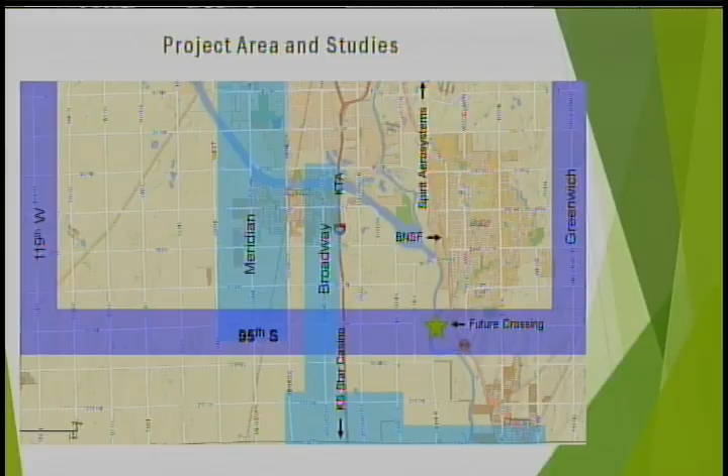There have been a lot of traffic studies done in this area. It started with the South Area Transportation Study done by WAMPO in 2008. There was a 2011 South Meridian Corridor Plan, a 2012 South Broadway Corridor Plan, and the 2013 Casino Area Transportation Plan, all of which made reference back to the South Area Transportation Study, and then ultimately the ARC 95 study completed by Sedgwick County in 2017. So a lot of research has been done on the transportation needs in this area and identifying the need for improvements.

The South Area Transportation Study was done by WAMPO in 2008, and it indicated the need to make improvements to the corridor. Specifically, it emphasized a lack of a good east-west corridor in the south area and the need for an additional river crossing. It specifically indicated that the existing river crossings at 47th Street, 63rd Street, and 83rd Street would exceed their capacity within about 20 years, or by 2030. Well, that was in 2008. We're halfway there, so now we're looking 10 years out and running into capacity issues on the existing river crossings.

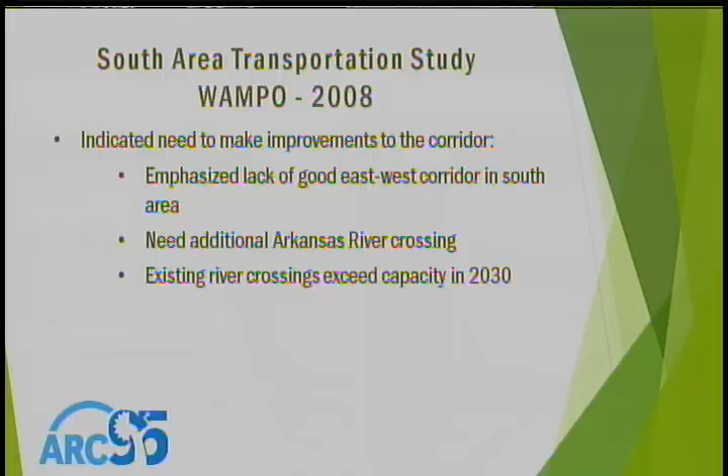The ARC 95 study was completed by Sedgwick County in 2017, and it took the South Area Transportation Study and refined it, making specific recommendations. The South Area Transportation Study was a very good high-level view of the needs of the area. It evaluated different options, specifically looking at grade separation, a new grade-separated corridor all the way through the southern region. That was determined not to be very cost-effective.

The numbers were kind of astronomical on that, and then it landed back on maybe looking at a parkway system that could connect the south portion of the WAMPO region to northeast and northwest Wichita by connecting to Kellogg at 119th Street and Greenwich. So it developed cost estimates, evaluated options, and also set up a phasing for implementation of the improvement. This was a much more refined look at what needed to be done, what barriers were in the way, how those barriers could be addressed, and then how you would implement those improvements.

The focus was on 95th Street between Broadway, US 81, and Woodlawn, just east of K-15, and included the potential for a new KTA interchange. When the South Area Transportation Study was done, KTA was involved in that process, but were not, I would call them, too cold on the whole idea of another interchange to the turnpike.

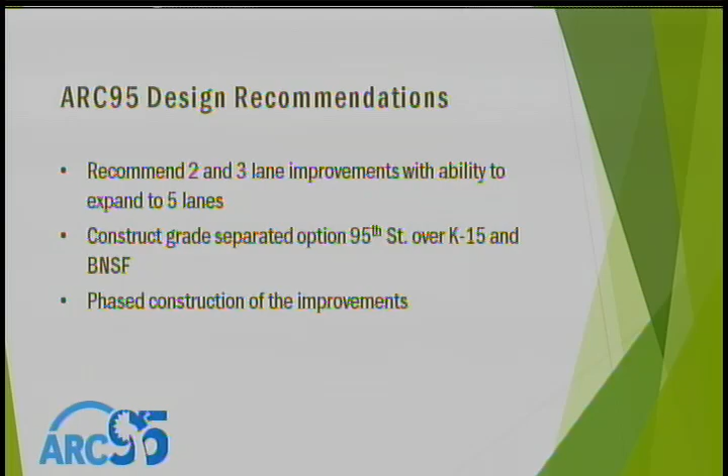The final recommendations of ARC 95 included 2 and 3 lane improvements with the ability to expand to 5 lanes, construction of a grade separated option at 95th Street over K15 and BNSF Railroad, and then phased construction of those improvements.

So again, if you see the magenta or the purple, it's okay. The magenta is phase 1, and that's really the lion's share of ARC 95. It's the crossing, and it's the big money piece of ARC 95. The rest of the phases of ARC 95 can fairly easily be implemented with local funding in fairly small chunks.

But the magenta includes a little bit of improvement at US 81, and that's because as soon as you build the river crossing, the traffic increases and you're going to need additional lanes at that location.

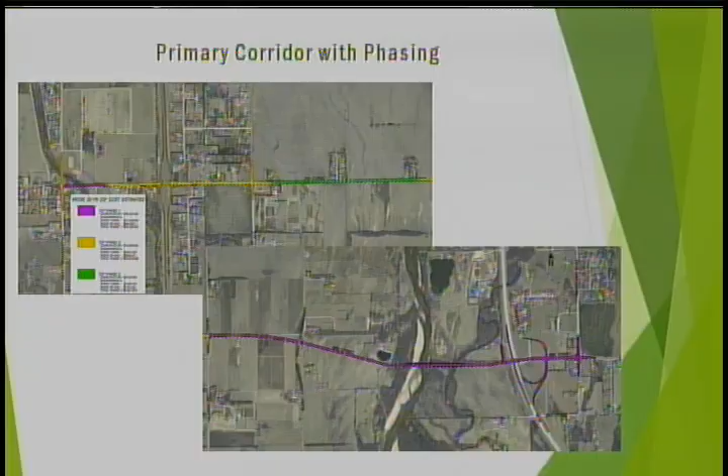The big piece is the crossing of the Arkansas River and the new interchange at K15. That's phase 1 of the improvements. It's fully directional at K15 and grade separated. It's the only river crossing south of 83rd Street, which is 7 miles before you get down to K53. It's also the only grade separated crossing of BNSF Railroad south of Kellogg, so it provides a significant improvement in that regard.

This is, again, the crossing. As I said, it's fully directional and grade separated, so you can get it over the railroad tracks.

I mentioned the turnpike being supportive, and I mentioned the public being supportive of these improvements. The railroad is supportive of these improvements too, and if any of you have worked with the railroad, that is not always easy to say. The railroad, as part of this process in dealing with the county, actually agreed to allow a portion of the bridge abutments in railroad right-of-way. That's how they felt about these improvements, and it's almost unheard of for the railroad to allow anything to encroach into their right-of-way.

So a lot of support because of the grade separation. This is a mechanism to get freight across the railroad without doing it at a grade crossing, and it provides access to K15 in that process.

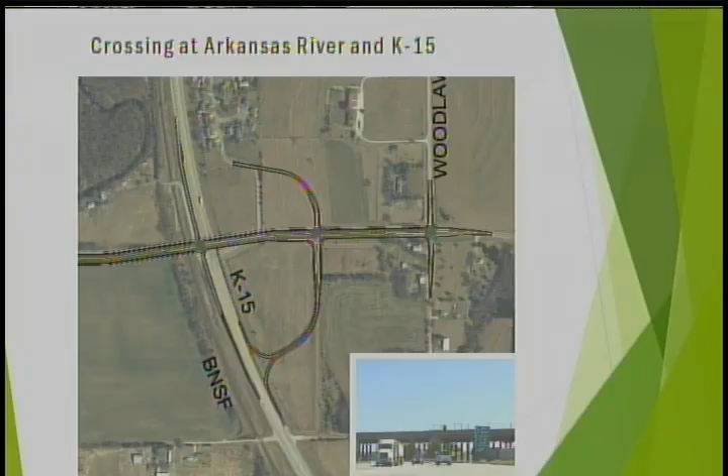Benefits of the project are enhanced safety and emergency response, and improved traffic flow. This provides an alternate to a lot of traffic from K15. Specifically now, traffic that comes up K15, including trucks, a lot of it goes all the way up to 47th Street, where it queues up. The turn lanes at 47th Street cannot support the traffic demand for that left turn for northbound traffic. So this provides turnpike access before you have to travel all the way through the K15 corridor to 47th Street—you can get on the turnpike and head north. A lot of that traffic that comes up now and has to turn left and drive through Oaklawn to get to interstates could use this corridor instead.

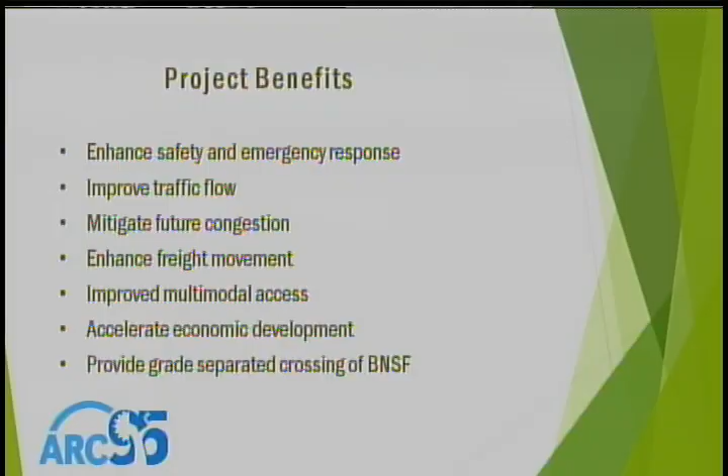It mitigates future congestion, enhances freight movement, improves multimodal access, and accelerates economic development. That entire 95th Street corridor becomes very advantageous to manufacturing development when you have direct access, grade separated, to K15, and direct turnpike access from 95th Street. So there's a lot of vacant land out there that's available now that could be utilized in the future. And as I said before, it provides a grade separated crossing of BNSF.

The project supports 4 of the 5 stated outcomes of the MTP: safety and health, integrated multimodal transportation network, economy and mobility, and quality of place and talent. The study did also recommend pedestrian improvements and shoulders, so there's a pretty good safety enhancement there. And also an opportunity—we hear there are a lot of bikers in Derby, and probably all of you do too—there are not, in the rural areas, shoulders and things that facilitate bicycling out in the county. So this does provide a mechanism for bicyclists also, for an east-west corridor with grade separation.

Project cost for phase 1 is $62 million, for right-of-way, design and construction. I know that sounds like a lot of money, but when you look at regional priorities and regional goals, because we're out ahead of this and planning ahead for it, it's pretty cost effective. That's a year's worth of right-of-way on some projects to purchase, and one phase of a larger project for construction. So the numbers are big, but when you compare it to other projects for the benefit you're getting, this is a very cost-effective and manageable project.

So why? Enhanced safety, economic development. It alleviates congestion and addresses future capacity issues. The next steps: it needs to be included in Move 2040 as a regional priority. Possibly a protective overlay - I know the county and city of Wichita have used that mechanism with the Northwest bypass. And then funding right-of-way and design so that we can continue to move forward and be prepared to access funds for construction and the improvements.

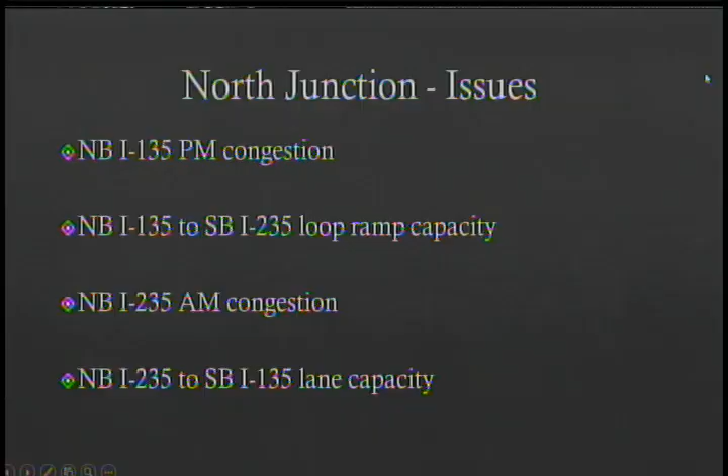A little bit about the North Junction — the issues there everybody's familiar with. In the morning, you have an issue coming into town, particularly northbound 235 into the area. Then in the evening, you have an issue going northbound on 135 to go southbound on I-235. Everybody's familiar with the loop ramp up there.

A little bit about the interchange — I have some notes I'll flip through as we go. This interchange was designed and opened to traffic in 1964. The 1957 plan showed traffic at 9,330 vehicles per day. Anticipated ADT in 1975 was 23,500 vehicles per day, 2.5% trucks. Coming in from the interchange from the east, we've got about 19,000 vehicles. From the west, 52,000 vehicles. From the north, 47,000, and from the south, 78,000. It's about 10% trucks on 135.

The study area for this project extends all the way from West Street to Hillside and from 21st Street to 53rd Street North.

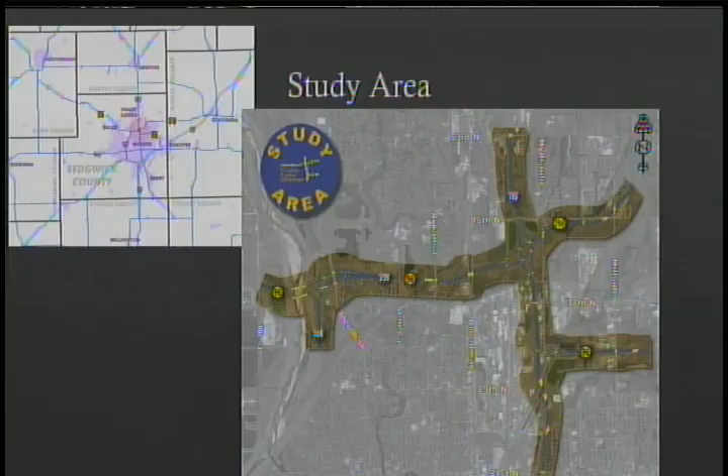We like to look at needs for highway systems in terms of congestion, using level of service A through F. This is in your handout somewhere in one of these — I don't think I made it into both presentations — but generally, like a report card, A is good, F is bad, and in our system we add an E in between D and F. E and F are unacceptable.

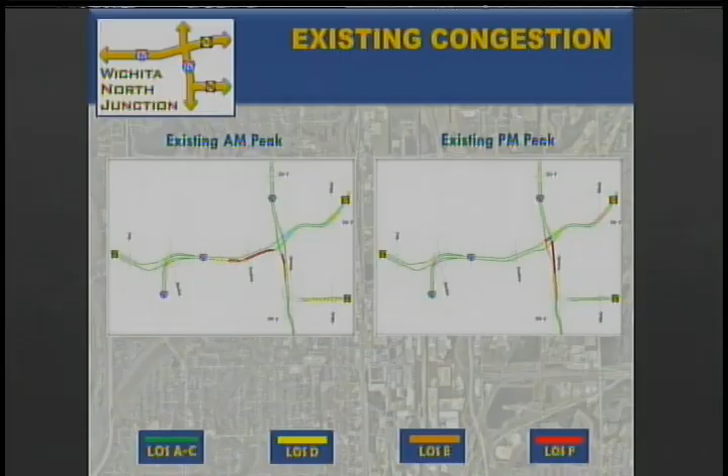At the beginning of the show, in the morning this shows level of service F coming into town, right over here, and then going north in the evening, another level of service F. This is the future no-build 2050 anticipated traffic, showing a complete breakdown at the North Junction — so bad it affects traffic all the way back to 96 coming in. In the PM, it affects traffic, obviously still northbound, but now 254, 235, and 96 are thrown in there even worse.

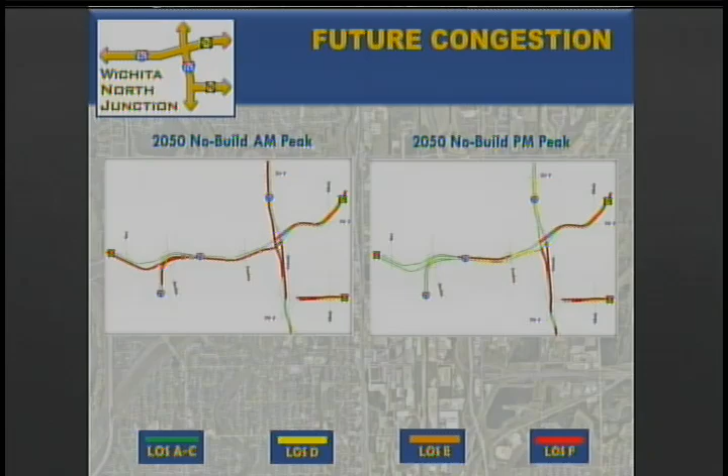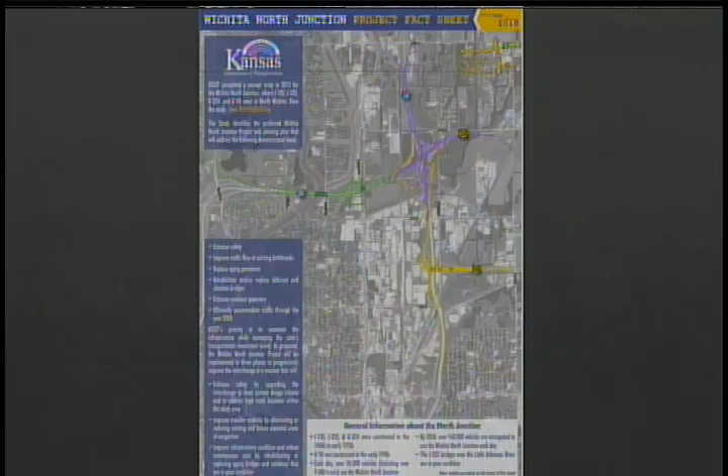This is just a fact sheet showing what we looked at for the North Junction improvements. This shows the 3 phases of the project that I'll talk about.

First, we identified some high priorities. There are quite a few on this interchange, but number one is the loop ramp up north here. This flyover ramp takes care of that issue. The northbound, or morning congestion for traffic on 235 wishing to enter the interchange, is taken care of by separating them, not grade separating, but separating them so they don't have to merge with 135 traffic. There's another improvement down here we'll talk about in a bit.

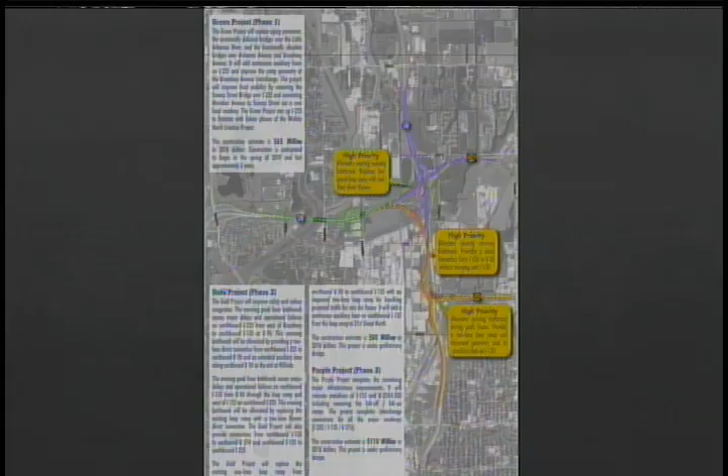The first phase of this interchange project is actually under construction already. We're doing the green project right now. Right now you have 2 lanes over the river. In the future, there will be 3 continuous lanes over the river with a 4th auxiliary lane for an off-ramp and on-ramp for Broadway. So pretty major improvements underway up there.

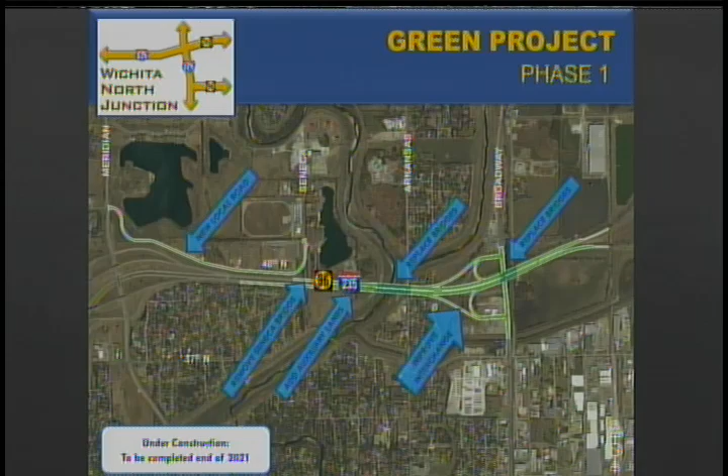You can also see how much of a change there is in the connection of Broadway from this area here, which is where the old ramp was. It widens out a lot, and you can see that when you drive through.

This touches on a little bit what I mentioned earlier. High priorities for this area: the flyover, the direct connection, and also the auxiliary lanes on K96.

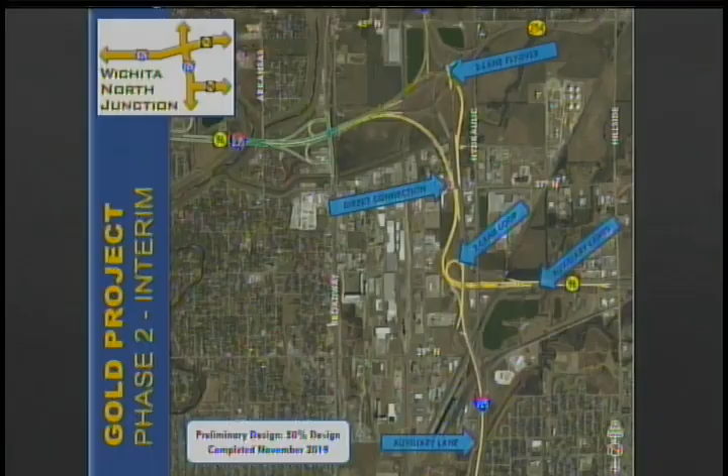This is a concept of just the Gold project as it stands currently. It shows the flyover, just a picture.

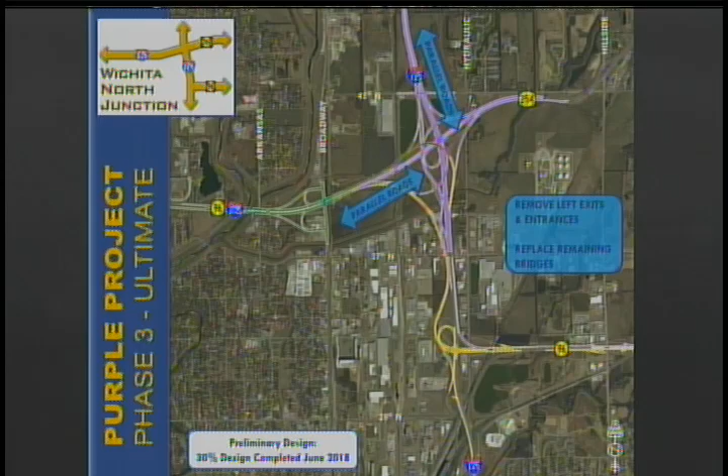This is phase 3, the final phase of the project. After Gold is constructed, we construct what we call the purple phase. In that phase, 135 northbound and southbound are put back right next to each other, and also the east-west portions of 235 and 254 are put back together. That allows for quite a few things to occur during the purple phase. It removes the left exits and replaces the remaining bridges up there.

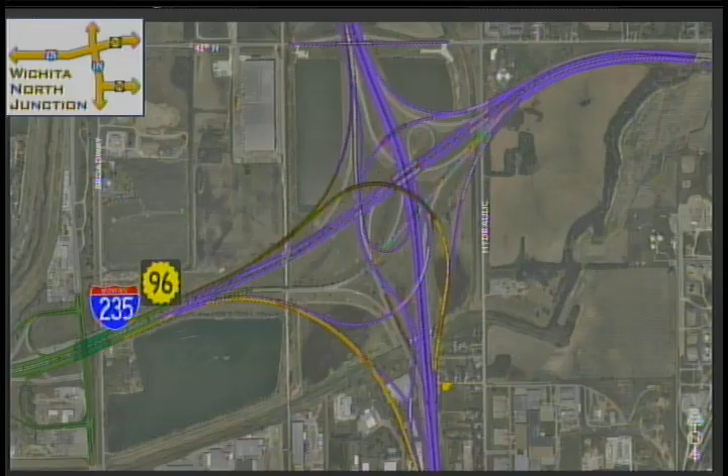This is a close-up, a better view of that area with the purple, the gold, and the green all shown together. There are some interesting movements here. When you look at southbound 135, your decision to move and come down this direction gets separated way back up north of 45th Street.

As part of that, any project KDOT has that goes over—used to be $25 million, I think it's $50 million now—has to go through a value engineering study to make sure we're spending our money wisely and doing the right things. That study was conducted.

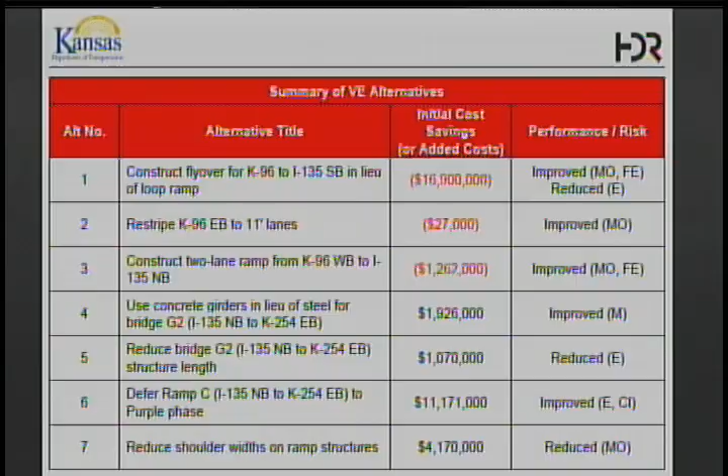In your packet, all this is in there, but it shows 7 alternates that were considered. The first one is to construct a flyover instead of a dual lane loop ramp, restripe K96 to 11-foot lanes, and construct a 2-lane ramp for westbound 96 to 135 northbound. Number 6 also talks about deferring one of the movements till later.

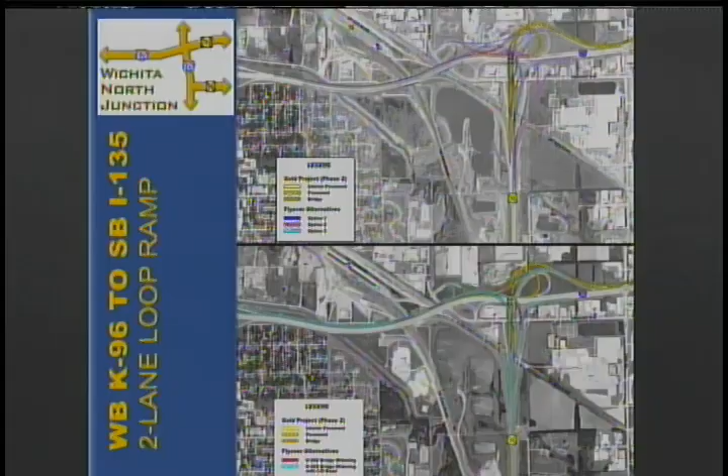Part of this, when we look at that number 1 priority of the loop ramp—we're taking the loop ramp. The north loop has 14,305 vehicles a day on it. The south loop, or the proposed dual lane loop ramp for westbound K96 to southbound 135, actually has 16,220, so it has more vehicles on it than the northbound loop.

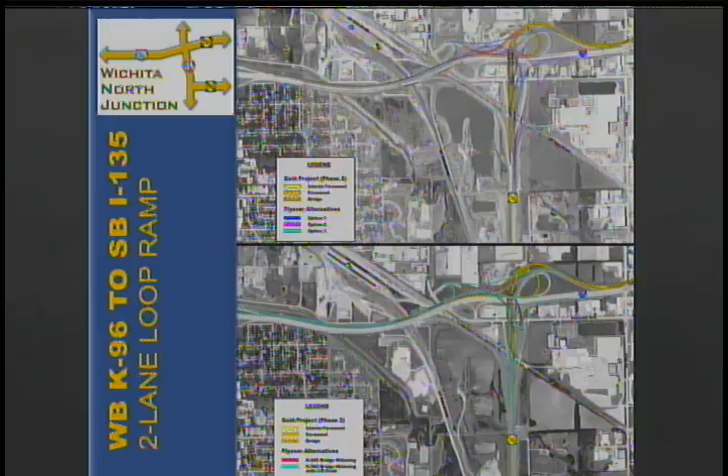If you like going 30 miles an hour on system-to-system interchange loops, raise your hand. Nobody appears to. So we thought it'd be better to look at a better option. With that, we decided on kind of a shotgun approach to what we looked at. You can see quite a few different options here. The gold is still shown, and the 2-lane loop is still shown in each of these with other options.

So the North Junction Gold project reduces the congestion—we've talked about all these items. It ties into the green project really well; that's what it was designed to do. It provides that direct connection. And these value engineering proposals, I'll talk about a little more.

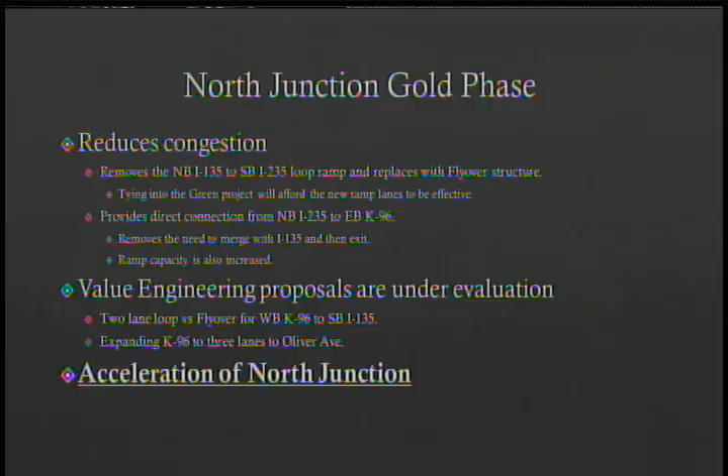The 2-lane loop and the K96 expansion. I also want to talk about the acceleration of the North Junction.

So we went to a meeting 3 Mondays ago during that snowstorm up in Topeka, and we visited internally about what's the best thing to do here. We agreed to move forward with—I'm going to call it the Not Gold project, I don't know what color that is, magenta or something—but that's the one we're proceeding forward with.

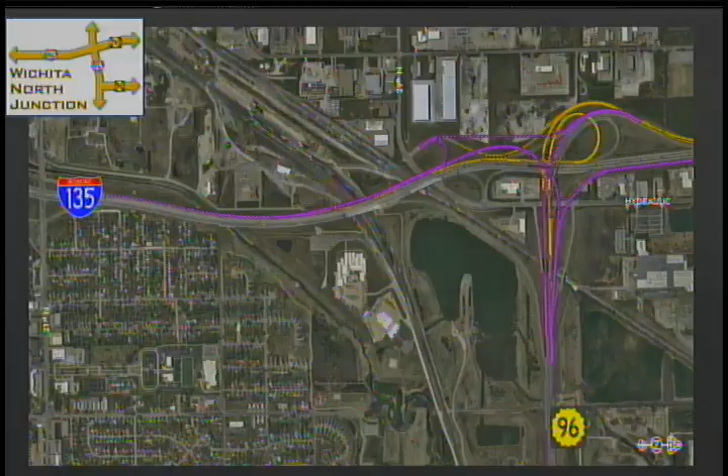It is, instead of the Gold Project widening these existing bridges over the railroad, making new structures over the railroad. The existing structures are already challenged by vertical clearance for the railroad. Encroaching on that anymore is not a good option, so this sets it up for the future.

As part of a program we call a cost share program, we started off looking at what we could do to make a better improvement to this interchange, because this is the highest priority in the region. We heard that loud and clear - getting rid of that northbound movement and the loop ramp is a really high priority for everybody in this room and KDOT.

So we looked at what we could do and came up with an option. This was an option we proposed, talked about between KDOT, the city, and the county, and this option started moving forward. The issue with this option is it doesn't create a full connection.

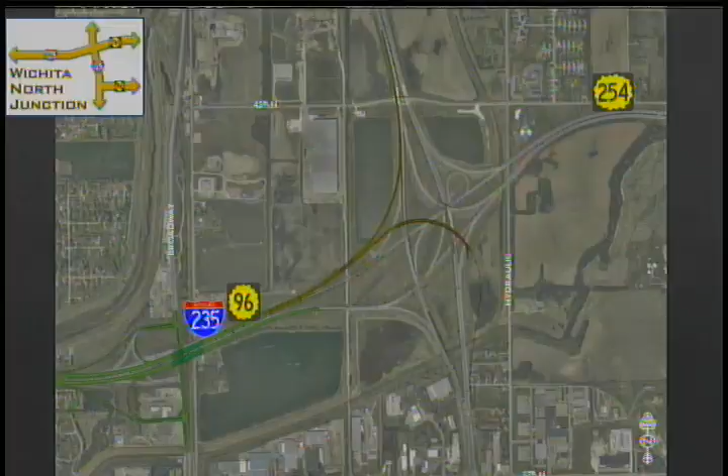So we decided, if we can - and there's some issues with crossing the channel here until all the permitting is in place, but we think we can work through those - ultimately the cost share program is a full-blown build of the entire flyover ramp for northbound I-135 to southbound 235, doing away with that loop ramp. As part of that, the southbound I-135 movement to southbound I-235 ramp is also reconstructed, with new bridges over the railroad. This is a cost share program with a 25% match, by the city, county, and KDOT all together.

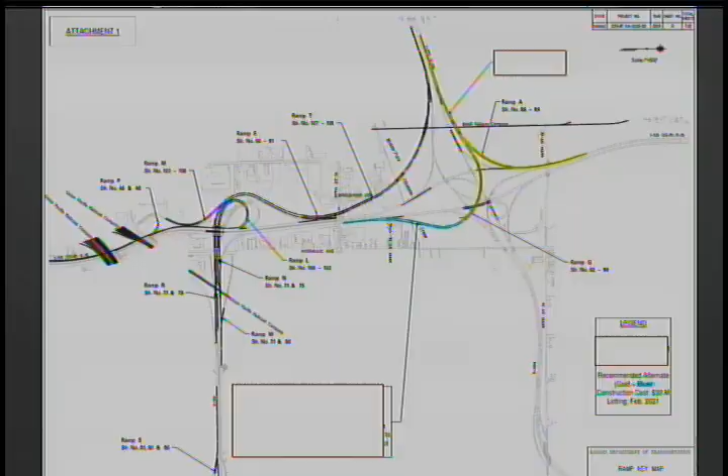So that's the North Junction. Does anybody have any questions?

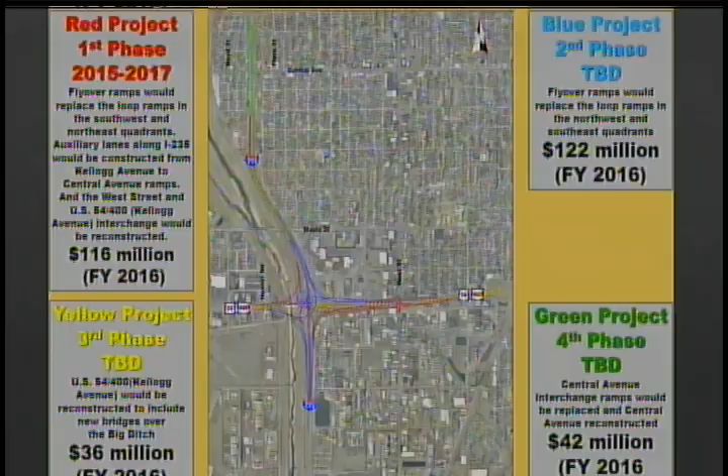Study area for these improvements really went from Ridge Road to West Street and from K42 to Zoo Boulevard.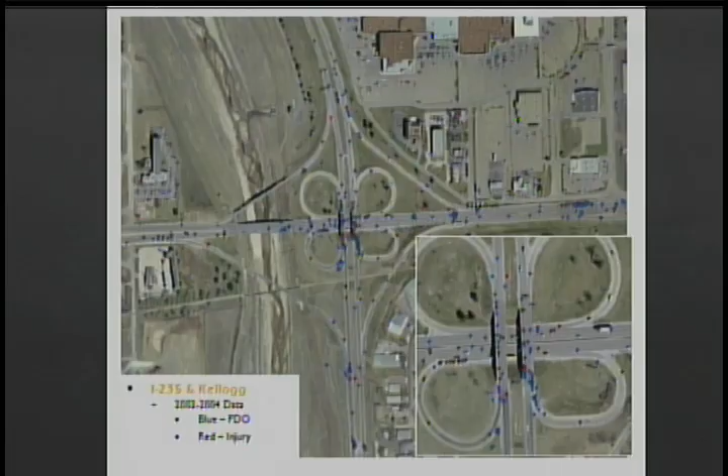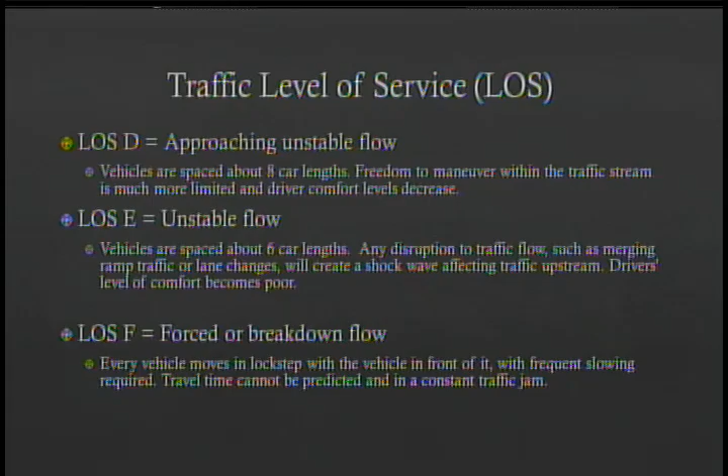So these are definitions for level of service that you could use. Again, E and F are unacceptable.

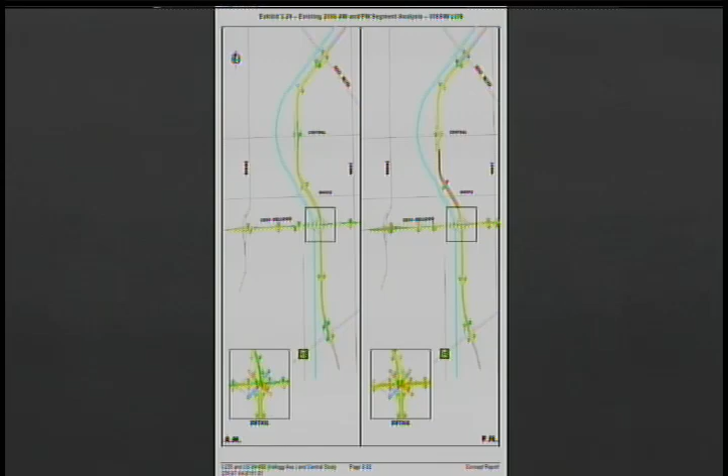So anytime we do a project, we do modeling of traffic - what's out there now, and what's it going to be like 20 years down the road. This 2006 information, when we did this, showed that northbound movements had an issue. I know we've all probably seen traffic back up from the Central off-street ramp at the time back onto US 54 and all the way back onto the shoulder, even encroaching into the lane. And that's what's represented here.

The 2030 anticipated impacts, back when this was done, showed the level of service being impacted very adversely if nothing was done at the interchange, particularly southbound, and also really each direction from the interchange.

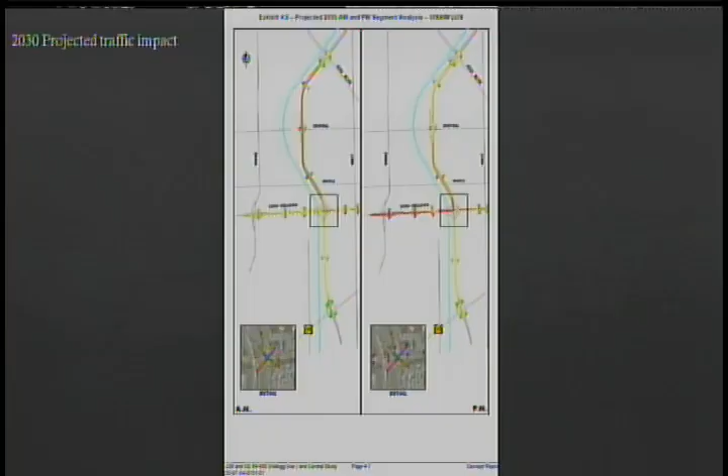These are some concepts when we went through the design process - what does that interchange need to look like for the future? Ultimately, we selected a fully directional 50-mile-per-hour ramp. It has a braided ramp down at the bottom here for West Street. Lots of you have probably taken that ramp and seen that - it's called braided because you intertwine those two movements.

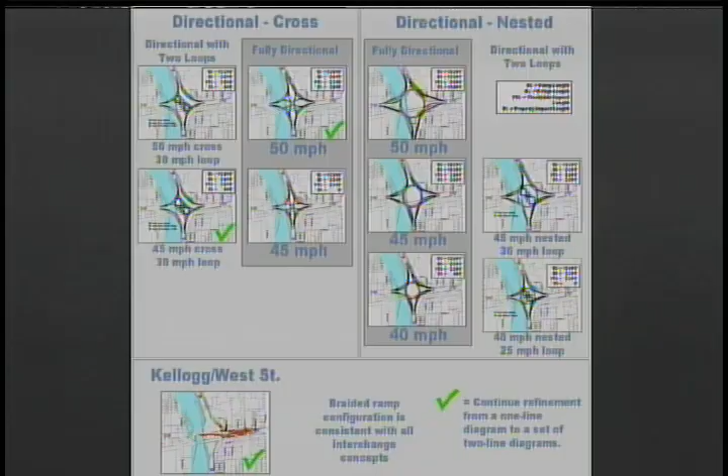The Red Project field check, when we did it, I remember this well, in 2012 there were some issues we addressed. One was we decided at the field check to go ahead and add an auxiliary lane to 235 from Central all the way down to the interchange. With that, we widened the Maple Street Bridge. Bridges over 54 are some old dinosaurs, a bridge structure type that doesn't last very long. It's a sonotube, it doesn't work very well. We went in and wrote a really tight calendar completion date to fix those bridge surfaces, so hopefully they'll last till the next project comes through.

And preservation of the I-235 median. If we ever need to widen to the inside, the pier configuration on those plans wouldn't have allowed it. So they were modified, and now it opens the corridor up to be able to widen to the inside if it's ever needed.

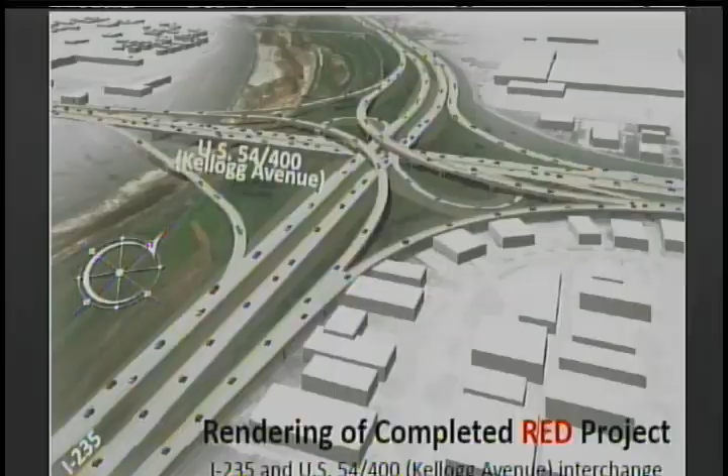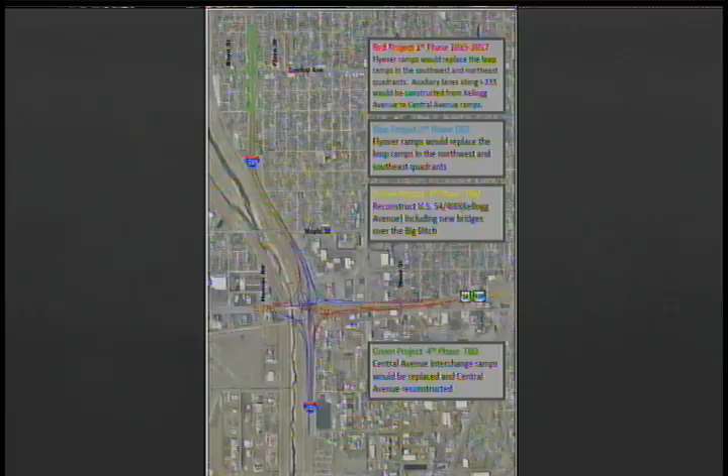We're going to look at the area with the worst traffic flow at this interchange, and that occurs on the West Street on-ramp right down here. This is the interim Red Project. You can tell the hourglass of the fully directional movements from 235 to 54 are constructed here. This is the old ramp right here, and this is the new ramp that was constructed. Really, this project sets us up to begin the Blue Project.

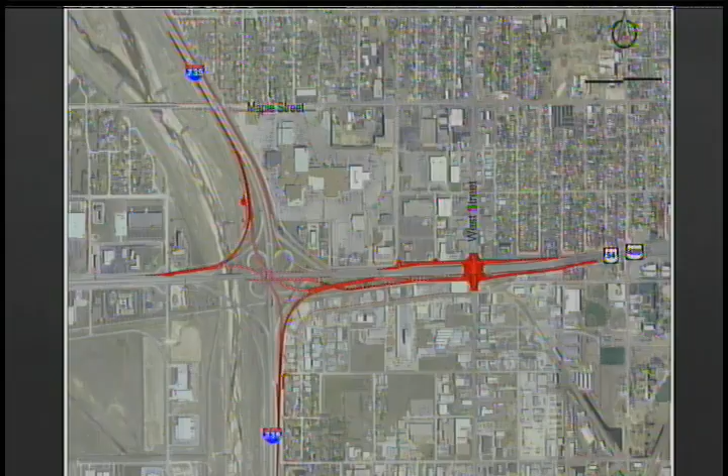So the main issue we have with the interchange currently - and this was already known when the Red Project was built - there were a couple items known. One is the narrow shoulder on US 54 that's out there right now, which is an interim condition. Also the weaving movements that happen for West Street: West Street wants to get on 54, and westbound 54 wants to go north on 235, and that movement causes congestion and backup. Here's another close-up of that area.

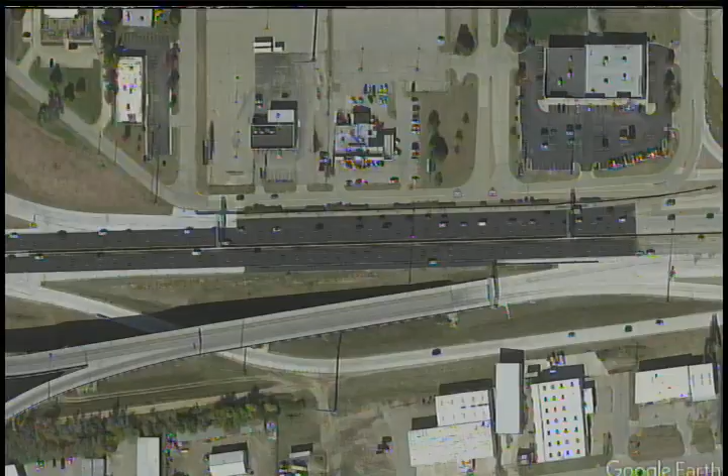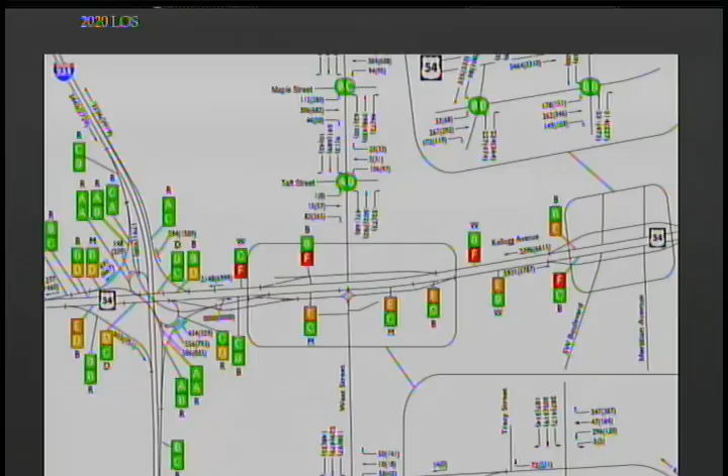And this is the projected level of service at 2020 as a result of the West Street movement. I'll briefly go into now what the Blue Project does for that movement.

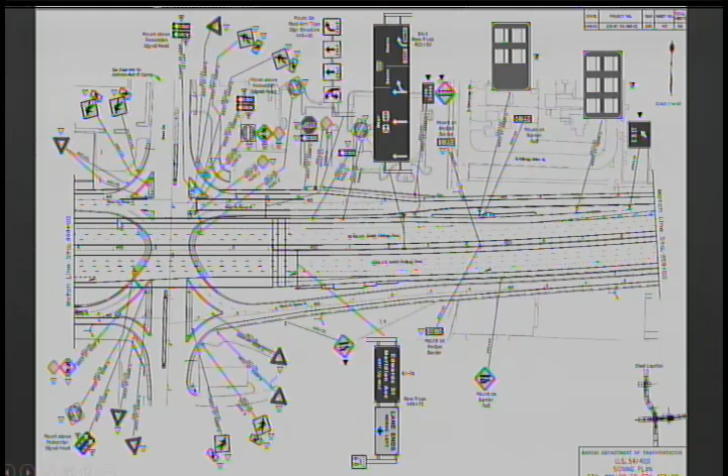This is a close-up that shows West Street separated from US 54, and that merging movement is taken out. Probably boring looking at plan sheets, but at least there are some signs to show you what you see. So there are 3 through lanes on US 54, and there's a dedicated lane right here. That dedicated lane will go northbound to I-235. As you come across it over here, you go northbound to I-235. There's also an opportunity to go southbound. So this ramp that's going to be constructed is 2 lanes wide.

West Street is still up north of this improvement, hasn't come in yet. Really, this is where everything kind of mixes together. You've got 54 already on these 2 lanes - 1 will go northbound, 1 will go southbound. West Street has the opportunity to merge back in this area. When they come onto 54, they merge with northbound traffic under a normal condition. If they want to go southbound, they go underneath.

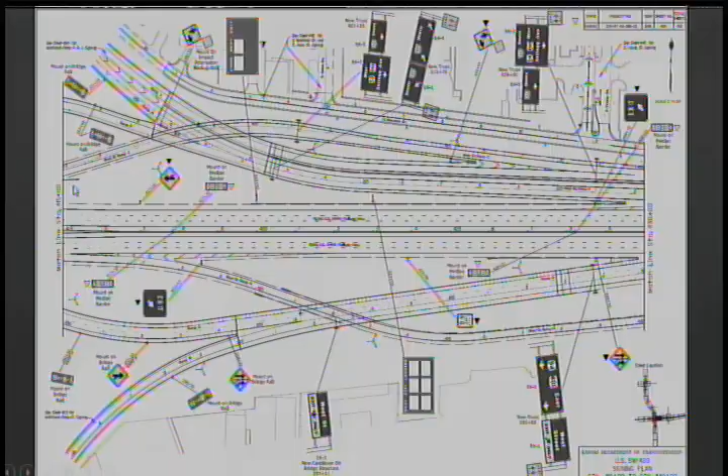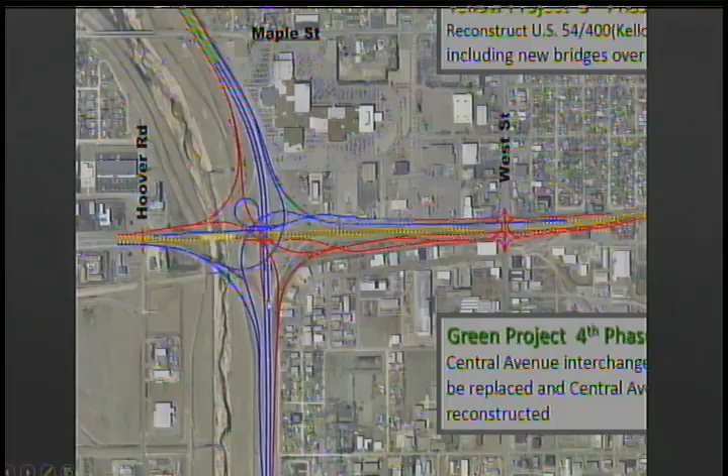Right in this area here where West Street goes underneath, the one loop ramp that you still see on this project is dedicated for westbound West Street to go southbound on I-235. That's the only people that use this loop ramp right here. So when you see this in the final configuration, it's important to remember that part. It completes the interchange, makes it fully directional in all directions.

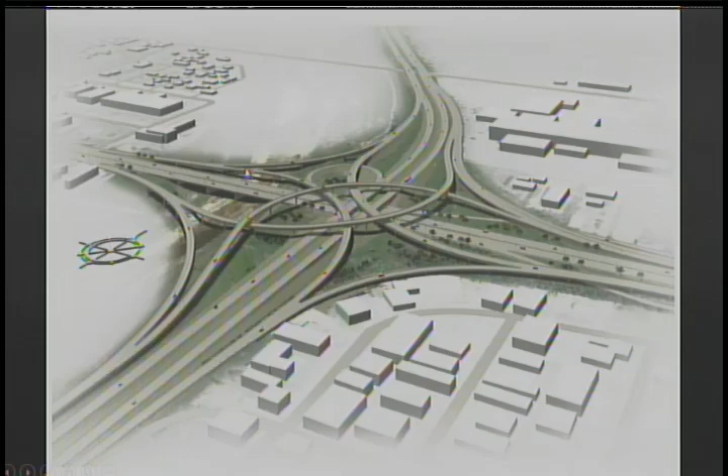And there's a rendering of it. You can see the red project here, the little hourglass looking thing. I don't know what this is, a Tootsie Roll or something. It's just kind of the other movements here. This would be eastbound 54 to northbound 235. This would be westbound 54, comes up and over to southbound I-235. And it would be the first, what I'll call, 4-level interchange in Wichita.

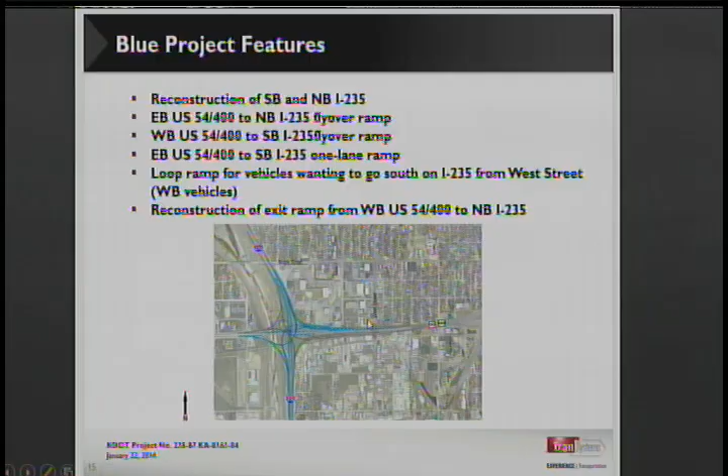Similar WAMPO top 5: it reduces conflict points and modernizes ramp movements. The interchange is pretty outdated, level of service F on 54, which could over-promote local system usage. It reduces congestion, which could impact mobility, maintains the expected commute times, and maintains a level of service that's desirable.

So with that, it's a pretty quick overview of 2 of those projects. We work on a lot, but I'd sure be happy to answer any questions you have.

Thank you. Appreciate the information and update. Sure.

So we'll go on to the executive committee updates. We met last month, and as the executive committee we looked at a 1.5% raise for all employees, which mirrors the cost of living. We are putting together, Chad is working on putting together a new salary scale for all employees, and we'll have a report on that in the near future.